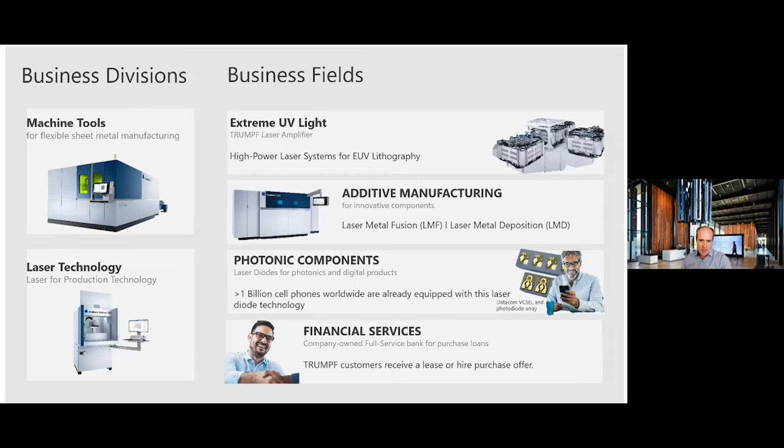And besides battery production, where many of our lasers are going at the moment and where lots of really nice applications are to be found, we have applications, as mentioned, in mobility, but also lots of applications in consumer electronics, medical, science, watches, jewelry. So the good thing about the laser for us, of course, is you can find applications in more or less every industry all around the world.

Yeah, and as mentioned, my second job is on the board of the VDMA. So also here, just a few words so that you know where we are. You know that the VDMA is the association for machine building companies. It's a huge organization with many working groups inside. And one of the working groups is the battery production division, where we focus on battery cell production, but also on all the technologies for production of modules, battery packs, and so on. So in the end, the complete process chain which is needed to supply batteries.

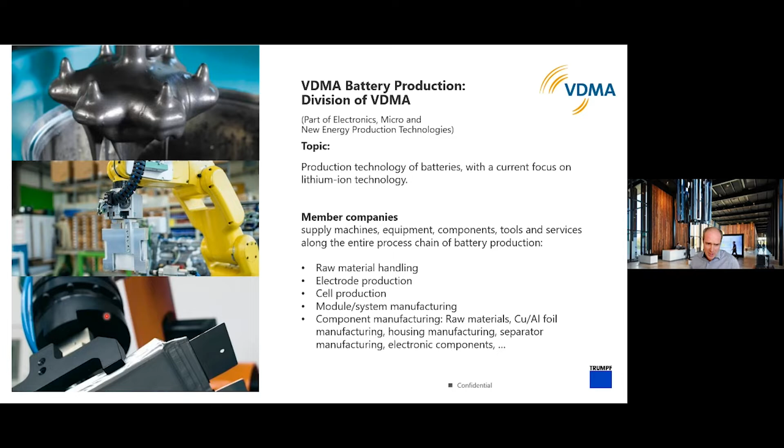In the past, the focus was more on consumer electronic batteries, but in the last few years, and I think also in the near and mid future, the focus will be mainly on automotive applications. If you have a look at our member companies, I think it's more than 100 companies at the moment, with different topics and different solutions. May it be coating, calendaring, but also sensor technologies, handling companies, robotic companies. So with this group, we are really giving a complete picture of the machine building industry which has solutions for battery production in Europe.

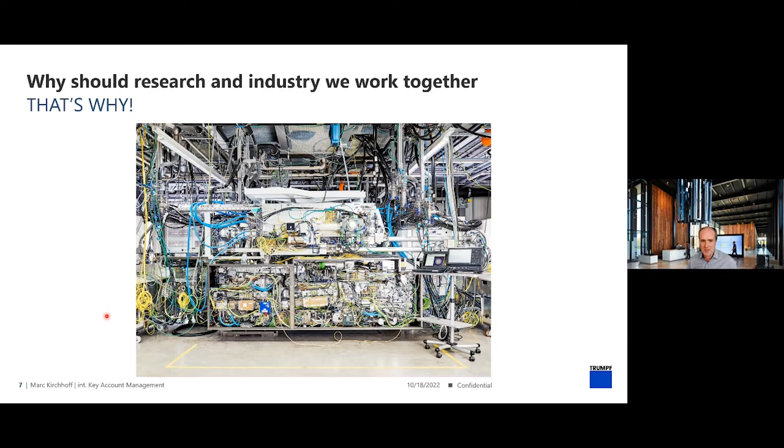Yeah, as mentioned already, we are pushed by many things. We means the machine building companies, and also, of course, the producers of battery cells, modules, packs, whatever. And therefore, we always need new ideas. We need new ideas for fulfilling the customer requirements, to create industrial solutions, to improve what is already existing. So there are many things coming up.

Besides all the technical things, the topic of sustainability also becomes more and more important, which is of course quite good in many terms. But besides the ideas, we of course need an industrial realization, because without this industrial realization, the best idea is nothing for us in the end. So that's where we as the machine building industry come in, to make a production line out of an idea after several years and after several packages of development.

For this, and to find out how to focus the development, because I think you are aware there are so many things you can target with R&D projects, we have established for many years now a road mapping process inside the VDMA, where we try to answer the core question in the beginning, of course: Is there an attractive market, and where is it? And what can we do as machine building companies to participate in this?

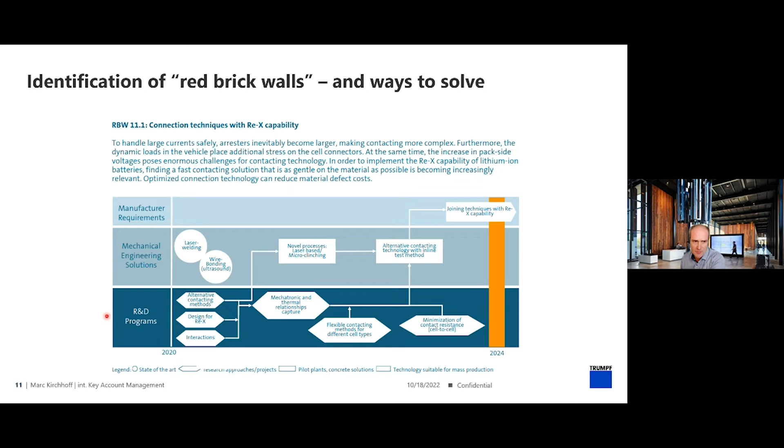One example, besides the road mapping process, and I think there was a speech this morning, is a UKBIC initiative in the UK, which is now also established since a few months and years. I think I don't have to spend too much time on the manufacturing process here. There is a complete production line, of course, with participation from German and European suppliers, also from Asian suppliers. And the goal, of course, is to set up a complete production line and then to solve some questions, to do some research on it, and of course, to improve the manufacturing process in the future.

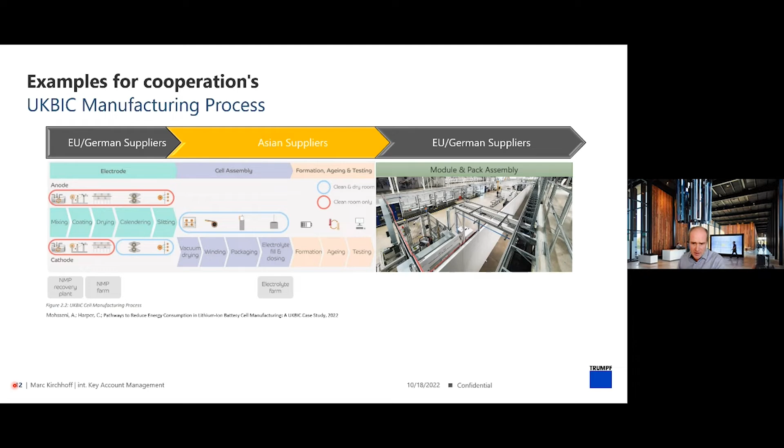And also here, the question is why should we do this? Why do we need these kind of pilot lines? And I've done it together with my colleagues from the VDMA from two sides. One is the machine suppliers' and manufacturers' view. For us, it's a way where we can do some practicing for mass production. It's not so easy for us as machine builders to realize these mass production tests, because normally we are only building up our machines. We don't have a complete dry room or whatever in our fabs. So that's why we really need these kind of cooperations with the R&D institutes.

We have the possibilities here for optimization, especially because we are able to not only assume how the material comes in and what the next steps are doing, we really can see it directly. So we have a direct feedback loop on what is the impact of our single component, our single machine, for the complete process chain. Yeah, a learning field, I think it's quite established. We can use it directly for developing or bringing up problems to, of course, find solutions for it, and therefore to improve the complete production cell process for battery production.

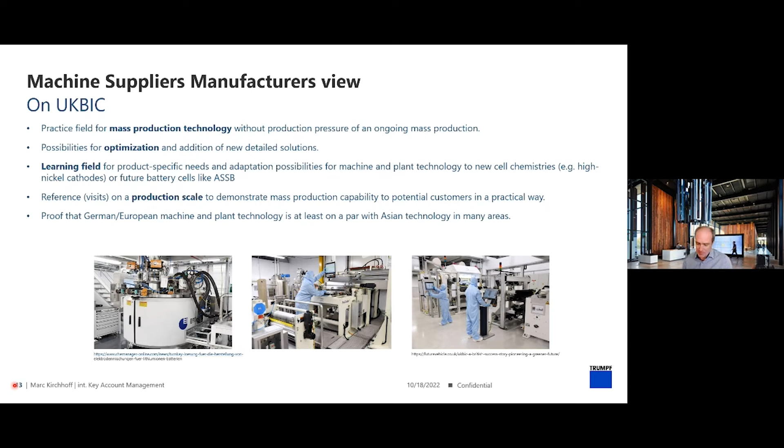So from the other side, we have these cell manufacturers, which in the end are our customers, which are buying our machines. They can use these kind of pilot lines and therefore use these cooperations also to see what's happening if they are not only doing it in their labs, but if they do it in terms of real volume, as Saskia already showed in the FFB approach. They can show how to scale up their production.

Often, in Germany you would say the devil is in the detail. So you really find out what problems come up only if you do this kind of scaling up before, of course, setting up a complete production line. You can understand the machinery and processes, but you can also understand what are the interfaces between them, how they are working together, what is the influence behind it.

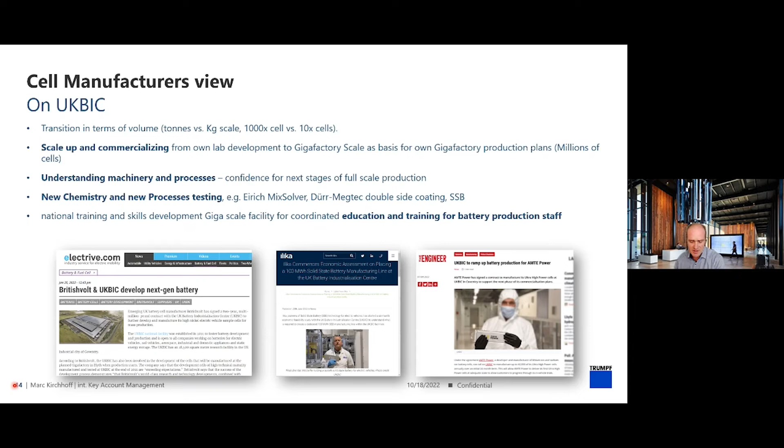If you connect all the machines to a complete production line, you can test new chemistry, you can test new processes without shutting down your main production line. And what is also really important, and I will pay a little bit of attention to it later on, is you can use these kind of facilities worldwide to educate your people for the production, and also for us as machine builders to get more expert in this field of battery production.

And that's exactly what I just mentioned. So often we are talking a lot about technologies. We are talking a lot about new technologies, improving machines, improving processes, and sometimes we forget a little bit that we also need skilled people to deal with and handle these machines later on. And we need it in all three steps, so to say.

Of course, we need highly educated people in our machine building companies to develop our machines, also to educate our customers to use our machines in the best way they can use them, and also to create new business ideas. So the laser drying is a nice example where you just think out of the box, where you can use the laser for other technologies.

As mentioned, we need the skilled people at our customer sites, also there to get the most of their machines, to develop new products. And of course, not to forget, we need these people also in the R&D institutes to bring in their new ideas, to be creative and develop new processes. And of course, then to educate new people, who then hopefully start in one of our machine building companies, and the process starts again and again. And this is a kind of a self-speeding up process, hopefully.

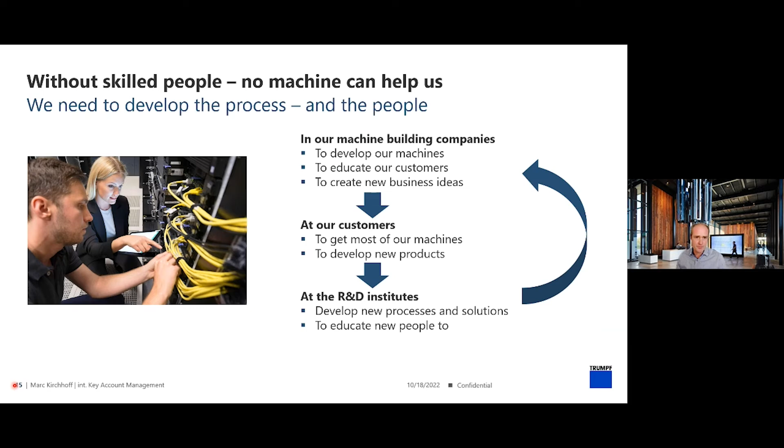So to bring it together a little bit, there could be the question now, why should we cooperate once more now with the FFB from the VDMA side? Because there are already some research production lines. There are already these kind of pilot lines there. And I think it's not surprising that our target in the cooperation between VDMA and FFB is to strengthen our global competitiveness from the European battery manufacturing side.

We want to speed up the research. Also here in the past, it often really took too long from the industry side to come from an idea to an R&D project to a solution. It could take several years.

So our hope and our target here is to really speed it up, to be faster by focusing on the right topic. Of course, in the end, we want to sell machines. That's what we are living from. That's why we want to create these kinds of USPs for us.

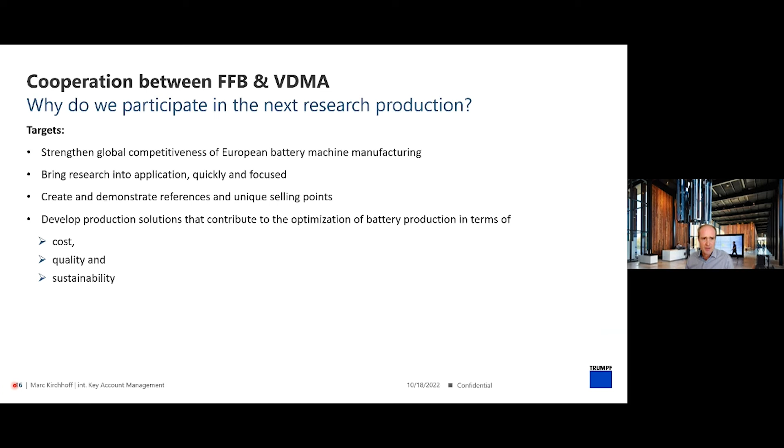And we want to optimize our machines to contribute, of course, to cost, to quality, but also, as shown, to the topics of sustainability, which is a major topic, which becomes even more important, and which can be a real USP for us out of Europe for the next months and years, I think.

To do this, of course, we have a wide range of topics. We can do research projects, we can do procurement. I think that's nothing I have to spend too much time on. What I would like to highlight a little bit is what we see as different, also from the VDMA side. And this was also shown in the presentation before from the FFB approach.

With this lab line, which is now built up, we are really able to show a high volume production process, which is scalable, where we really can test our equipment. May it be in reality or may it be virtual, so to say, where we can just test some new equipment, try to find out what could be the impact on the complete process parameters and so on. And of course, we can really improve the process, and that means the overall process.

So not to spend too much time on just improving the laser process, if there is no impact on the complete production line. By having a look at and an understanding of the complete process chain, we can really spend our capacities, our investment, on what is needed to realize a really nice solution for our customers in the end.